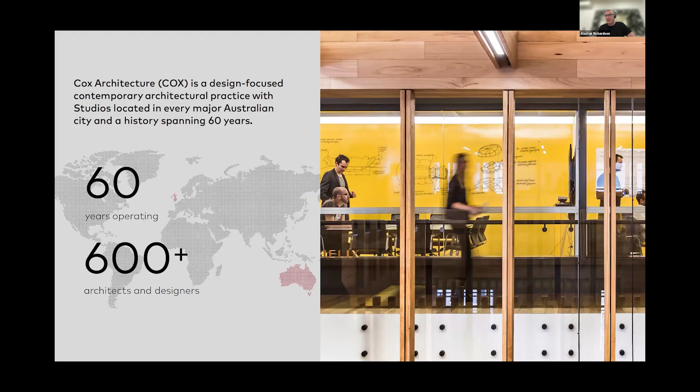So thank you very much, everybody. Cox Architecture is a design-focused architecture practice. We have over 600 staff, over 60 years of operating, and a part of our DNA has been public buildings, and in particular, sports buildings. We've won over 650 international and national awards, including for sports projects, but also major cultural institutions such as museums, hospitals, mixed-use developments, and educational projects as well.

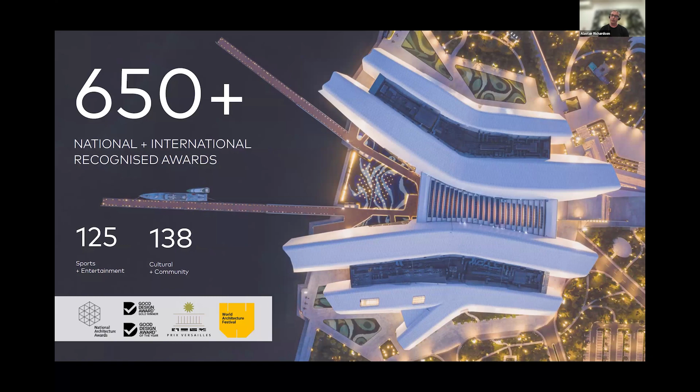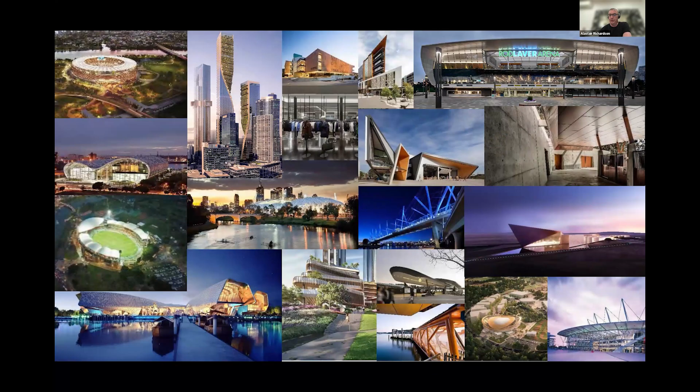What makes us unique in sport is that each of these typologies influences the way that we approach our sports buildings and entertainment buildings, particularly in relation to understanding the whole experiences and the experience economy of people as they go about their daily business, and also celebrate their team's performance or a concert. Our projects are varied and have been throughout the world, with extensive projects throughout the Middle East, and as I mentioned, a lot of award-winning projects, but also civic projects are a core element of our work.

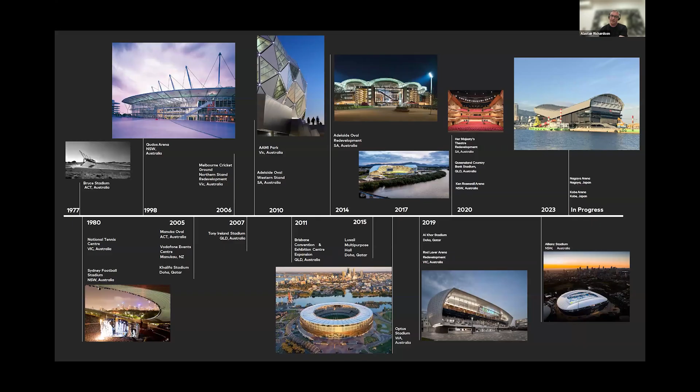With over 60 years as a practice and over 35 years myself individually as a leader in sports architecture, the great thing about these buildings is they are the people's palaces - we often refer to them as the people's cathedral. Every one, however, needs to be unique. It needs to reflect the community that it serves, the team that calls it home, and what its expression is to a global market, because quite often with global television, this is the first snapshot that a venue or a city might have to a world audience.

So I'm going to start with some approaches of how we deal with contextual relationships, making every venue unique to its circumstance. This is the current stadium on the drawing board - it will be the world's first indoor cricket stadium, 30,000 seats, built on reclaimed land as part of the old port of Hobart, Australia's second oldest city. It sits at the foothills of Mount Wellington and engages a CBD of, by our standards and yours as well, a small city - only 150,000 people.

But the unique thing about this one was building the big sky, this amazing dome, 260 meters by 170 meters, with a timber and steel hybrid structure, which uses local Tasmanian timbers as part of its structure, to create this amazing indoor environment where cricket will be played essentially throughout the year, while protecting it from the very harsh southerly winds we get here from Antarctica.

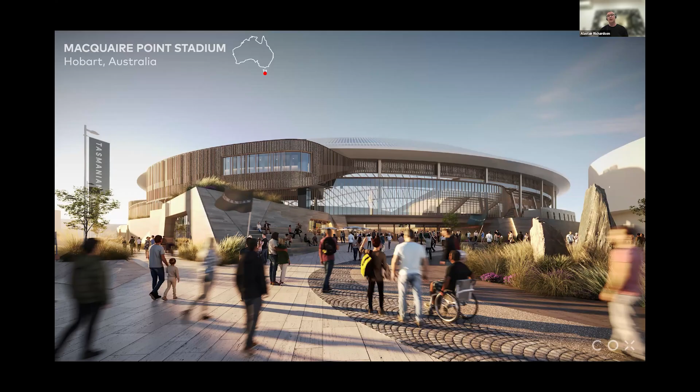I'll now take you on a journey to some other ones. This is the Sydney Cricket Ground, and for you cricket fans out there, you'll certainly know it. Next door, we've also recently completed the Sydney Football Stadium's reincarnation, a stadium that Cox designed originally over 35 years ago, which we replaced 5 years ago. And the new Sydney Sports Club, an integral part of the overall precinct, sits next to the Moore Park area, just on the fringe of the CBD in Sydney.

The cricket ground itself, the new stands we've done, the master plan, had to reflect and look at the issue of the original members' pavilion built in the 1850s and the ladies' pavilion in the 1880s. So the ground was designed as a series of pavilions rather than a coliseum, allowing glimpses through into the parkland, but equally honoring and framing the existing heritage buildings that are such a long-lasting memory of cricket. Arguably, cricket buildings here are as important as Lord's in London.

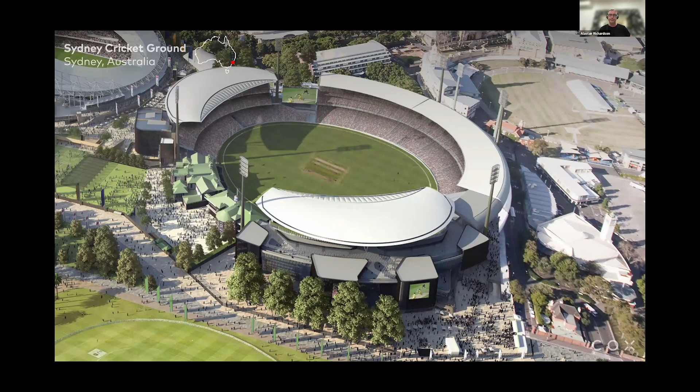The new Noble Bradman stand is the main members facility, directly located behind the wicket and the bowler's arm, designed as an element that is this great ceremony, celebration of cricket, this marquee for cricket during the summer months.

And then also at Allianz Stadium, this element of enclosure, getting the crowd right on top of the action, but then the uniqueness of tying in the Sydney sandstone, the Sydney heritage, the notion that this is the oldest city within Australia, and bringing the warring factions and the crowds together into the new stadium.

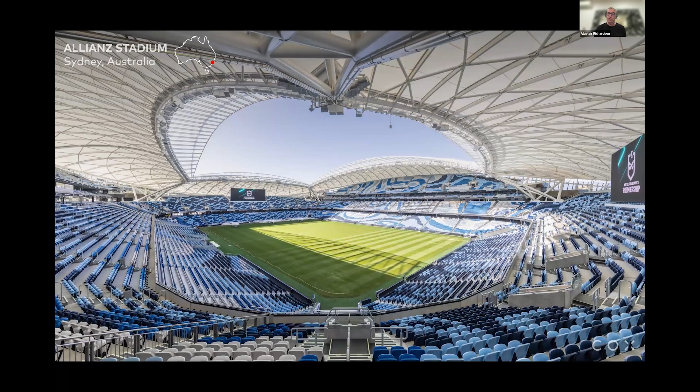Every stadium we do tries to look at a unique roof to create identity, to create coverage for everybody. This roof weighs roughly 30 kilos per square meter, designed with Schlaich Bergermann out of Germany, as well as AECOM here in Australia. You can see the patterning on the seat, which again is this reference towards Indigenous culture, done by a First Nations artist representing the place that Sydney used to be and the beginning of tribes, the bringing together of tribes in armed conflict in terms of how sport is played.

The health club is an integral part of this, because when we talk about sport, obviously we have the elite, the notion of the top performers, but community sport is equally important. Here at the Sydney Health Club, the Sydney Sports Club associated with the stadium, every person can actually meet with their sporting heroes within the pool and the gym environment of the location.

Back in 2017, we completed the new Optus Stadium, 60,000 seats, on the bank of the Swan River in Perth, WA. This was replacing essentially the WACA, one of Australia's most famous cricket grounds, and had to be a unique ground from day one that reflected the aspirations of the people of Perth, but also gave a destination and a real focus for bringing acts and events to Perth.

The new stadium was built on reclaimed land. We looked at issues of bringing the parkland back to life, of reinstigating the notion of over 50 years of degradation of the land to create this vibrant park. We included bridges, connections to train stations, and this shimmering light so unique to Western Australia is picked up within this anodized aluminium facade that completely encloses the stadium.

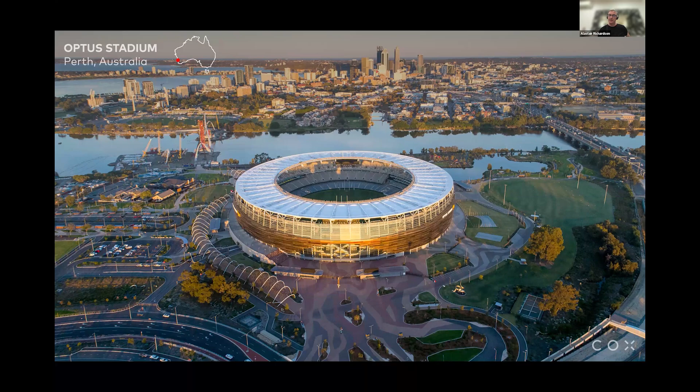Stadiums are also part of a digital experience. The stadium transforms itself at night into this lighting element that brings crowds together, creating stories, but also fans as well as the teams that call it home.

Inside the Great Cauldron, getting people as close as possible, looking at over 60,000 with the ability to expand to 70,000 people there for a day's cricket, or whether it's a 2-hour football game of our version of Australian rules football.

The next one, a different approach, was Adelaide Oval, home of Donald Bradman for cricket aficionados. This was set in a unique parkland setting on the edge of the CBD on the Torrens River, with each stand forming a unique pavilion, retaining over 200-year-old fig trees on the hill behind. It also now integrates a hotel into the stadium, with over 90% occupancy, making it one of the most popular hotels in Adelaide.

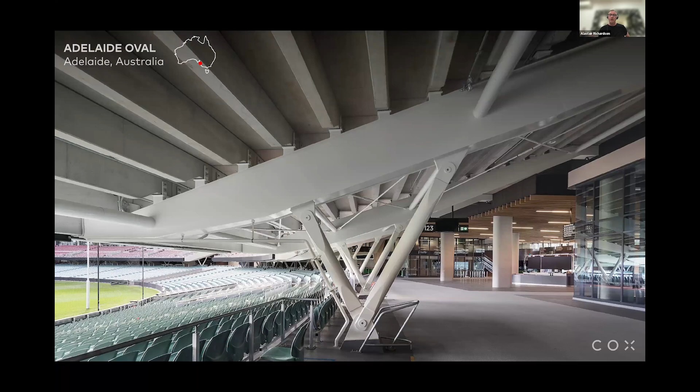Again, there's a sense of getting people as close to the action as possible, creating roof forms that reflect sound and increase the intensity of the atmosphere, while providing everything from premium hospitality experiences to general public experiences across the ground. Wide open concourses continually allow people to engage with the game, walking around like in a shopping mall, with food and beverage options and food courts located all the way around.

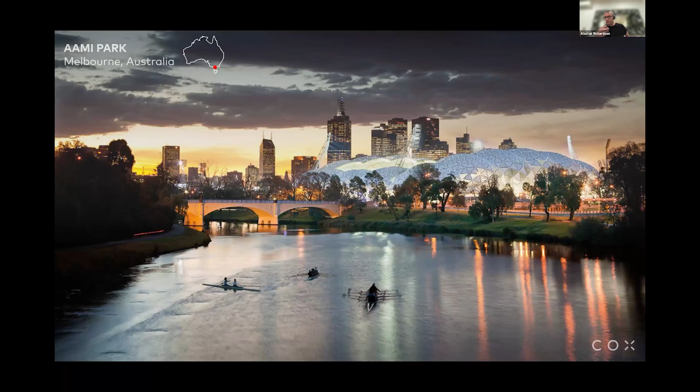The next project, to show this typological evolution, was an earlier project from 2010, the Melbourne Football Stadium, dedicated to soccer, designed around geodesic domes reflective of soccer balls as part of a unique structural system developed with Arup. This unique structure creates an identity that's particularly distinct in a city that's mad about sports, but not rectangular sports. This stadium had to create a sense of an icon, a landmark, and was very successful in that. The shells increase the atmosphere and intensity for fans watching, whether it's rugby or soccer games.

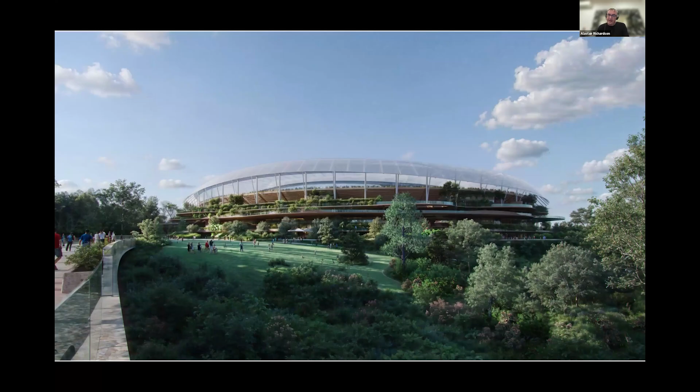Finally, as we run into recent work, this is literally off the drawing boards. Back in January, we were awarded the new Olympic Stadium for Brisbane 2032. It will form the home for cricket and Australian rules football in the future. Set in a verdant park, the stadium integrates the park into the building with landscape terraces, open air in a subtropical environment with breezes encouraged to flow through the building. Within walking distance of the CBD, it will form the focus for the whole of the 2032 Olympics.

With wide concourses, elevated bridges because of very undulating topography, lush tropical rainforests introduced around the stadium, and brise-soleil forming the facades of the building with rammed earth walls, as well as deep overhanging terraces and the removal of as much air conditioning in the building as possible.

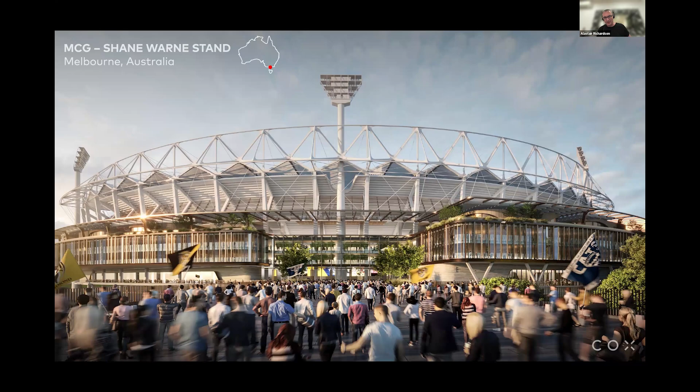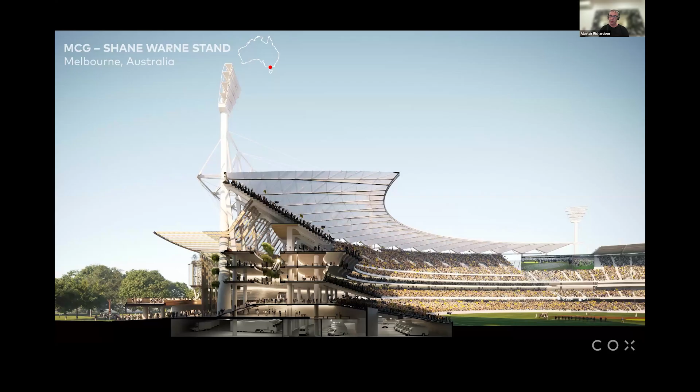And finally, the work we're doing in India, very different again, on the banks of the river in Ahmedabad, the SVP Sports Enclave, which has some 180 hectares of park. We're looking after the arena project and the new aquatic center project as part of the BCC consortium with Collage Design from India and BDP in India.

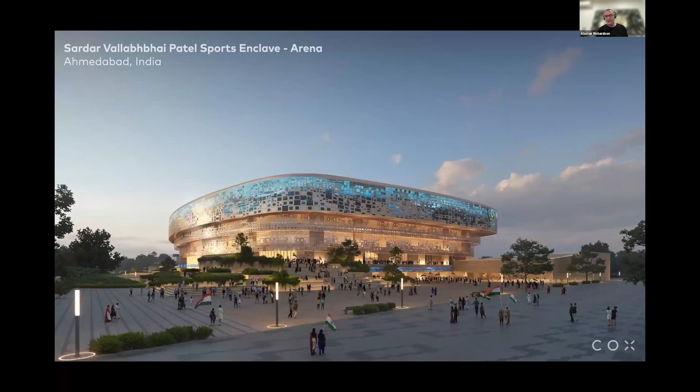The new arena will be India's first arena. The design has been heavily influenced by the climatic response within Ahmedabad, with step terraces forming the podium of the building and landscape rising up, and jali screens protecting the overall building from the intense heat, integrated with LED screens to create this landmark along the banks of the river.

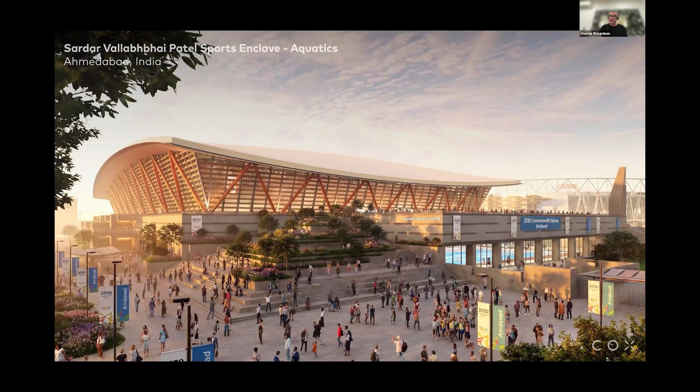Whereas the aquatic center pulls up the Diwali sense of a lantern overhanging the swimming hall underneath this area, creating this glowing light building, again integrated into the landscape as a part of the swimming venue for the 2030 Commonwealth Games. Hopefully that's a very short snapshot of projects. I think I have my 15 minutes. As you can see, every project is different. Every project approaches these components in a different way to create a contextual response that is full of life.

Thank you so much for sharing such amazing works, and of course, heartiest congratulations on such legendary spaces, and a warm welcome to India for creating such a space. Thank you very, very much.

All right, let's move on and welcome our next speaker for this session. He's an architect and urban designer whose work spans master planning, urban design, group housing, and hospitality projects across the country. He founded Kapadia Associates in 1991, and over the years the practice has grown into one of India's leading architectural firms with offices in Mumbai, Pune, and Bangalore. A graduate of CEPT University with a Masters of Architecture in Urban Design from Harvard University, he brings to his work both design depth and urban sensitivity. His practice reflects a strong understanding of context, human experience, and the role architecture plays in shaping the identity of place. He's also remained actively engaged with academia, serving as visiting faculty and advisor at several respected institutions. Today he will share how architecture can respond thoughtfully to environment, culture, and context, creating spaces that feel rooted, relevant, and lasting. Please join me in welcoming architect Kiran Kapadia.

Okay, I guess my screen is visible now. So this is just notes from the studio. Our studio is also about 35 years old.

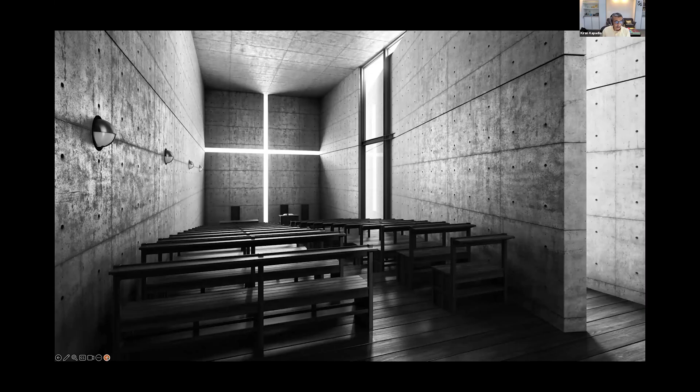Today we live in a society based on data, human information technology, and artificial intelligence. As these became the domain of computers, society will place new value on the one human ability that can't be automated, and that human ability is emotion. Imagination, myth, and ritual make up the language of emotion. Buildings and spaces will need to thrive and connect with their users on the basis of the stories and emotions that they generate, and this has been going on for centuries. The question we need to ask is: how can we generate an architecture that goes beyond the pragmatics of program and site, an architecture that creates relationships and narratives with its occupants? How can the fictive stories of the inhabitants script the architecture while architecture scripts the stories at the same time? I like to call this narrative hybrids—architecture that is composed of multiple simultaneous stories that unfold throughout the buildings we create. Our buildings have to tell a story, and the building that has the best story wins. What's your story?

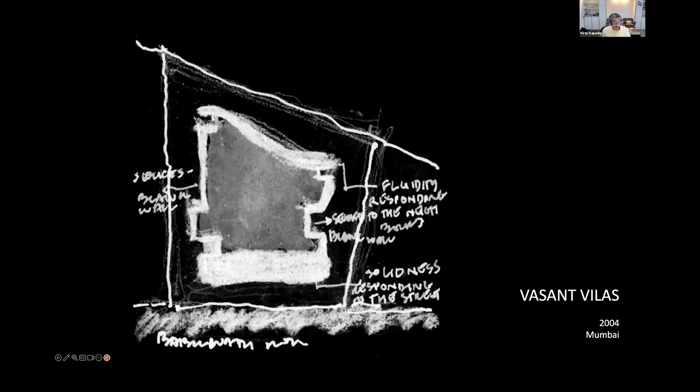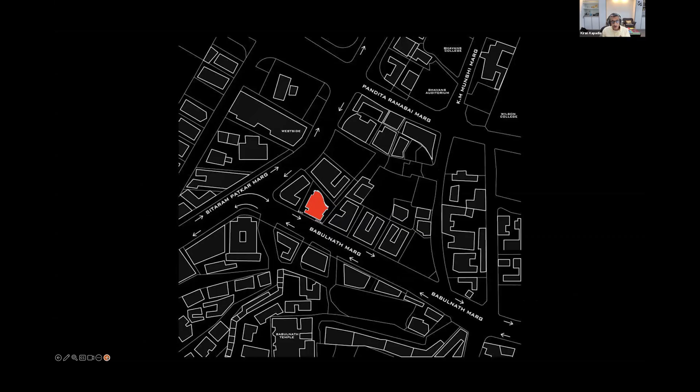What I'm presenting today is a journey through 4 projects, presented in chronological order. These projects vary in terms of program, site, and scale, and represent a humble attempt to articulate the issues that concern us. The first project is an apartment building located in downtown Mumbai, called Vasant Vilas, built in 2004. It's in a strong urban context, located in the inner city along a very busy road, and it is like an urban insert that comes in within a strong urban context. We're responding to the site and to the idea of an apartment building within very tight constraints, which you will see.

So it's essentially looked at in section, where you have parking and services located below, and then apartments located on 6 upper levels. There are apartments of different sizes for tenants, and up on top are 3 levels for the owners themselves. Since it's a very tight site, we've located a pavilion on the terrace, which becomes a community space for the entire building because there's no space available on the ground. That's the plan of the building.

The front edge that you see is a strong urban edge, restrained, very controlled, stone clad. The rear edge, as the building goes towards the end, becomes more fluid, with the idea of a strong load bearing wall in the front versus a fluid concrete wall at the back.

All the spaces seem to open more at the back rather than the front. The public functions are all located at the back, while some of the bedrooms, which require smaller windows, are located in the front. That's the section through it.

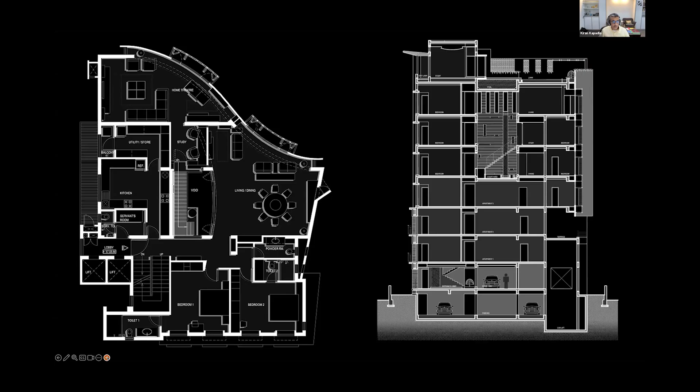They've got 3 apartments at the upper level, and then 3 levels for the family themselves who are the owners, with a courtyard that connects the 3 levels together, with a roof terrace, which is a community space for the entire building. That's the view of the building from the main road.

You can see the restrained facade along the front, with narrow punched openings, deep recesses, solid walls which cut the noise and also provide insulation from the road, and up on top the pavilion, which is the community space expressed as a clear element.

Another view of that. This is natural local stone that's been used with these small balconies that respond to the street. It's a way of talking to the city. That's what we're interested in, actually.

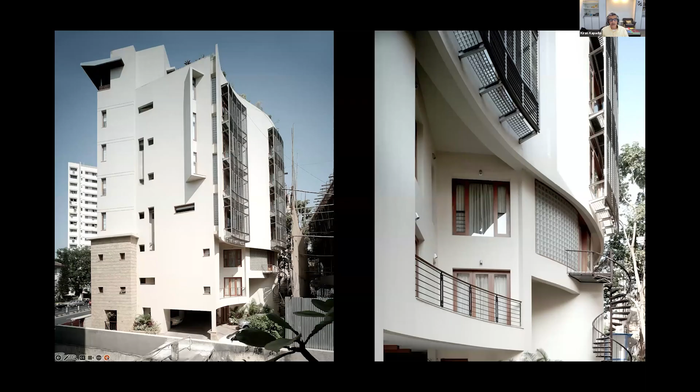The rear facade that you really see is far more fluid and expressive of the program that lies at the back. You can see these kinds of elements that capture views of the city, which you will see in some of the interior views.

The next project I'm going to talk about is a slightly different scale. This is a campus that we designed for Hindustan Unilever, a large international corporate house. This was located again in Mumbai, in Andheri. It's a 12-acre site, which houses the corporate offices for Unilever.

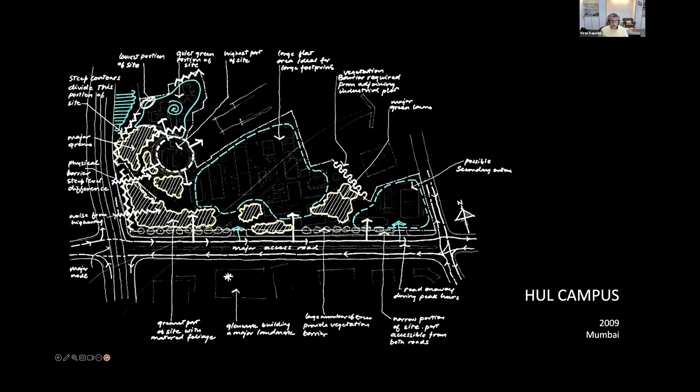There are a lot of existing trees at the site. It was their old factory, which they wanted to demolish and convert into their main campus, consolidating all their locations into one place. So we looked at the existing trees and decided to devise a very different strategy.

Typically an office building tends to be a big box building, since people want large spaces. We've actually taken the program and divided it into multiple components. What's interesting is that we thought, let's not make it like an office building, but more like a public building where the community comes together.

Here the community is the work community. One strategy was that parking for the occupants of the building goes below into the basement, while visitor parking is all located to the left, as you can see on my screen. Then the buildings are kind of working around a central street, which is the most dramatic space.

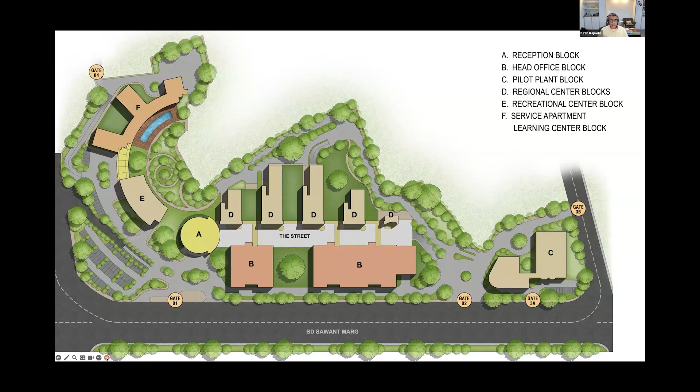It's got different functions located along the street. The street was conceived of as a public space, not like an office space. So you have public spaces at the ground level, like a media center, an auditorium, bank ATMs, a beauty salon, a coffee shop, music store, gift shop, an ice cream parlor, a food court, etc. And then up on top are really the offices and things like that.

That's the street. It's a dramatic kind of entrance coming in, and you see the street. That's the heart of the campus. It's a street that you walk through, people meet and greet here, and the offices are located up on top. At the edge of this street are the so-called breakout spaces for all the offices, so they break out and look onto this street. There's a communal aspect, and it doesn't look like a boring office building.

That was our intent. All the laboratories and workspaces open out onto the street, with public functions on the ground floor and breakout spaces at the upper levels. The street is also a transition space, linking different functions at various levels.

There's a strong response to sustainability, with strong light coming in from the north. The entire street is non-conditioned space, completely naturally ventilated. And we've retained all the trees that you can see on the left and the right of the campus.

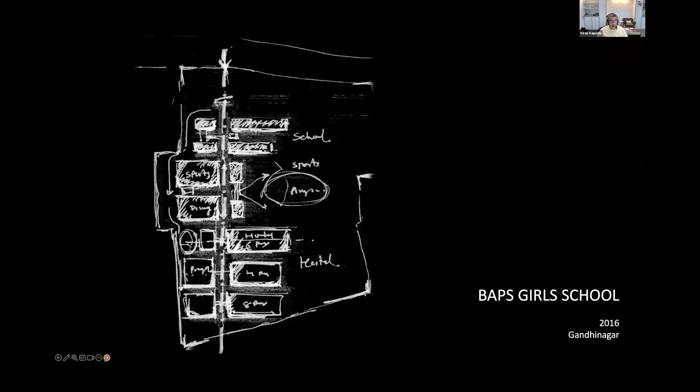Very different program. The third project I'm going to talk about is a girls' residential school just outside of Ahmedabad, in a place called Gandhinagar. It's basically, the way we did it, again, like the idea of the street at Hindustan Lever.

Here also we have a street, but this is an open street. We wanted to make the campus quite tight because moving from one space to the other, for these girls, we wanted to make as simple and straightforward as possible, because the heat is quite a bit and it rains. So we wanted a covered area going through, but done very differently.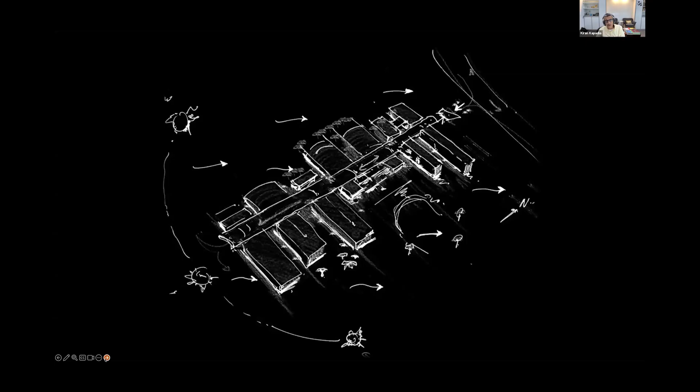This entire street is divided into three zones: the academic zone at the entrance, the social zone, which is the dining hall, prayer rooms, music rooms, etc., and then the last bars are the actual residential blocks. So there's a transition from academic to social to residential — that's how we've kind of transitioned through the space. That's the street you see images of, coming through.

These are existing trees, and there are various bridges that connect different parts of the elements. Again, rather than doing a big box, we wanted to break up the scale of the buildings as much as possible to make it really feel like a city where these girls are staying, rather than a very institutional big kind of setup.

That was the intent of this project, where we've broken up the program into much smaller identifiable components that people can relate to. As you walk down the street you see different buildings — a dining hall, a library, a gymnasium, a sports facility — as you walk down the street. The idea is that it feels like a city rather than a large institutional campus where these girls are staying.

Another image of that, people walking down the street, going to classrooms, coming back home in the evening with some other facilities in the middle. So that's what we've really done. Again, these are existing trees that have been retained and built into this so-called street all the way through.

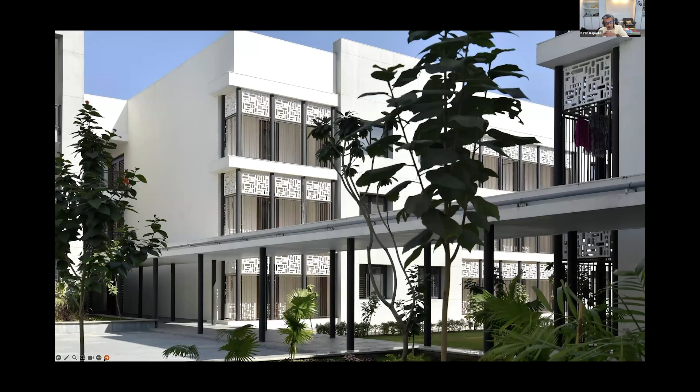Also, sustainability becomes a very important component of this project — just a few quick images going through it. We've got this kind of veranda that connects all the buildings together, a low-slung veranda. So rather than covering the street, we actually have this veranda that covers and connects all the blocks together.

Students can go from one building to the other, because the sun in Ahmedabad can get very strong, and it becomes very difficult in the summer months, and it does rain for a few months. So the idea is that this covered veranda is a modern interpretation of a traditional Indian element. We've used a lot of jalis as screens, quite apparent in the project. The veranda is intentionally low-slung, and kind of hugs you to the ground.

It's got a very human scale, while the street outside, which we've created, has a much more grander, bigger scale. Again, the veranda element wraps up the public areas. Sustainability becomes an important component here, where we've got these kinds of chimneys that take the hot air outside — these verticals you see are actually chimneys which take the hot air from within the spaces and exit it out onto the terrace up on top.

Again, the idea of using screens on the south side. The south has got a deep veranda, and the north is where the classrooms face. So again, passive design strategies become an important component of the building itself. You can see the deep veranda at the south of the building.

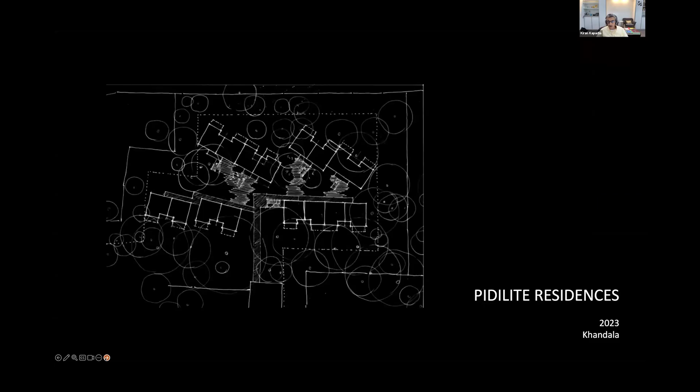The last project I'm going to discuss is a very different program. It's a corporate training center for a company in India called Pidilite, they make Fevicol, for some of you who may know this. This is a recently completed project, a very different challenge. It's a 5-acre site with 500 trees, and they wanted to create a training center. We were asked to retain most of the trees and the contours of the site, so we respected that tremendously.

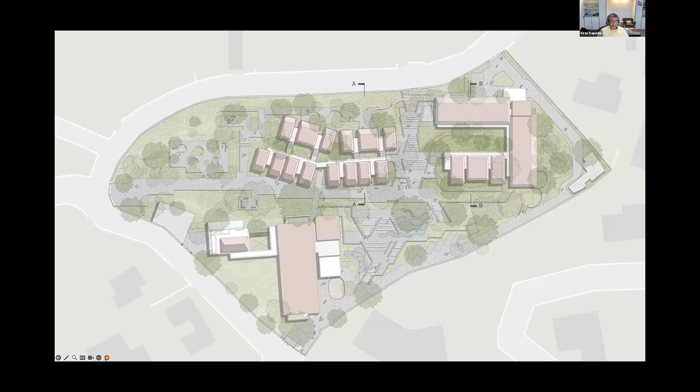It was more about breaking up the program into smaller components rather than doing a big building. These smaller blocks can twist and turn around based on the location of the trees, minimizing disruption, reducing cutting and filling to a minimal extent. So this campus, this residential learning center, feels like it's located within a forest, honestly speaking. These are some of the sections where we've allowed the land to dictate what we do, with huge overhangs to control the sun and rain.

And that's what the campus looks like. These are existing trees, hundreds of years old, and we've wrapped the building around these existing trees. You can see the periphery, and these residential units located within this verdant, luxurious landscape all through.

This is what we meant by allowing the land to dictate how we locate the buildings. So the buildings twist and turn, moving around with verandas connecting the different blocks together, singly loaded verandas connecting them.

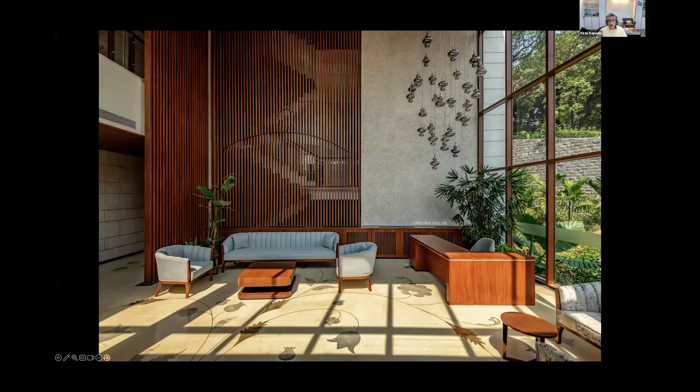So you have just 4 rooms, it's not done like a traditional hotel. You go either half a level up or half a level down, and that's how you enter the rooms. And that's the learning center, where you have conference rooms, teaching classrooms, and the entrance area. Here are a couple of interior shots of how we've articulated some of the interiors, with light coming into the public areas.

So that's the 4 projects I want to discuss, and I'd like to end the talk on a personal note. I started running late in life, at the age of 47, when most people think of slowing down. And I think I've learned a lot about architecture through running regularly.

I run marathons, and running marathons is definitely not about the competitive spirit. It's about reaching the goals you set for yourself. The same can be said about architecture. There is no such thing as winning or losing. What's important is whether your building attains the standards you have set for yourself. Similar to running marathons, the architect has a quiet inner motivation that doesn't seek validation from the outside world.

Running has definitely influenced my architectural practice. These are practical physical lessons: how much can I push myself, how much rest is appropriate, how much effort can I endure? How far can I take an idea and still keep it decent and consistent? How much should I be aware of the world outside, and how much should I focus on my inner world? To what extent should I be confident in my abilities, and when should I start doubting myself? These are questions I ask myself.

Exerting yourself to the fullest within your individual limits, that's the essence of long distance running, and a metaphor for my architectural practice. Thank you.